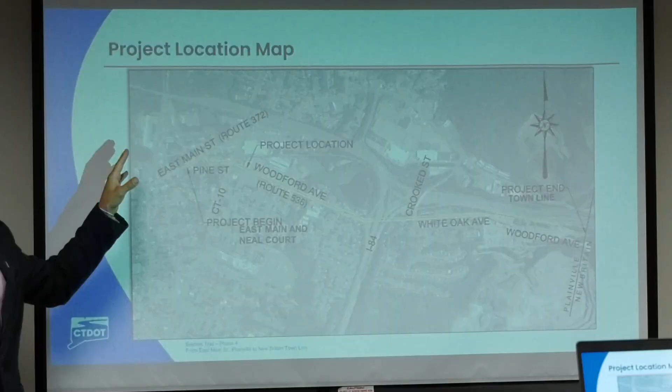So I'm sure everyone's familiar with the project. Largely the project's going to be along Route 536, the state route number, White Oak Ave and Woodford Ave. Any images I show you on the screen, north is always going to be up, okay? So if you're trying to get your bearings of where you are, north is up, similar to the image in the background. We're starting very close to where we actually are right now on East Main Street. The limits are going to be right at East Main and Neal Court, kind of where the Citgo gas station is. That's where this project is going to begin.

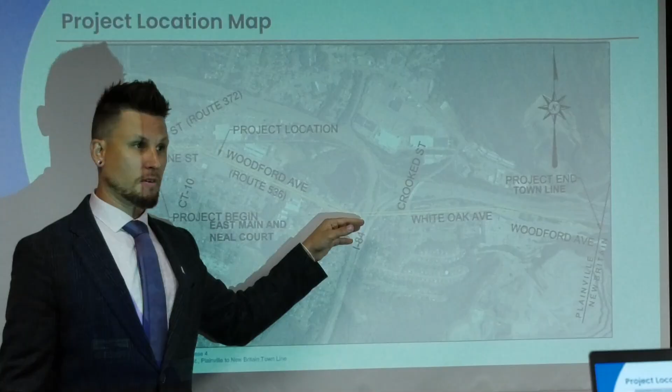There are other projects that I'll touch upon in a second that will tie into this. And then we're going to start heading eastbound, on Pine Street to Woodford Ave in front of the GE, all the way under the underpass of I-84. White Oak in front of Tilcon, and then we're going to get to the town line with New Britain. So that's kind of the general area of the project location.

So a little bit about the project, again I'm sure many folks know already. It's a linear trail, but there is also the addition of some concrete sidewalks. The linear trail is largely on the northern side of Woodford and White Oak predominantly. The southern side is going to have some new concrete sidewalks to tie into sidewalks that may already be there, so that we can create a holistic corridor. This kind of comes from the Complete Streets policy - we want to make sure that users or generators for this trail have access on both sides of the road, and can get to the trail or other sides where it may be necessary.

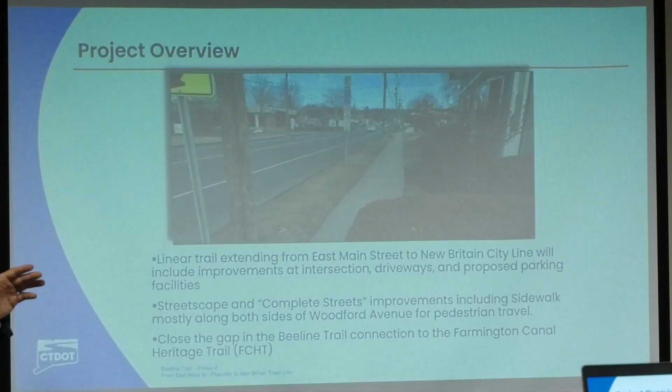So this is going to eventually take you from the Farmington Canal Heritage Trail in Southington, and bring you all the way to the CTfastrak station in New Britain, in areas north and south ultimately, but there are other phases that are already being designed and constructed - they're going to link into this.

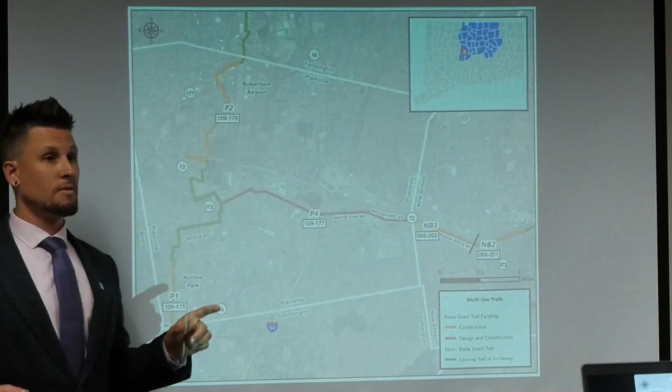So this is a map showing a few of the trails that are going on that I've already alluded to. Where we are right here, right in the middle, we call it P4 because that sounds way cooler, I think, and we use a lot of acronyms - if I have an acronym, please feel free to ask, because in engineering we love our acronyms, just like probably every industry. So we're talking about this maroon line, that's what it's going for, at least on this screen. Our orange line is New Britain Phase 3, Beeline Phase 3. Phase 2 and Phase 1 will eventually get you to the CTfastrak station.

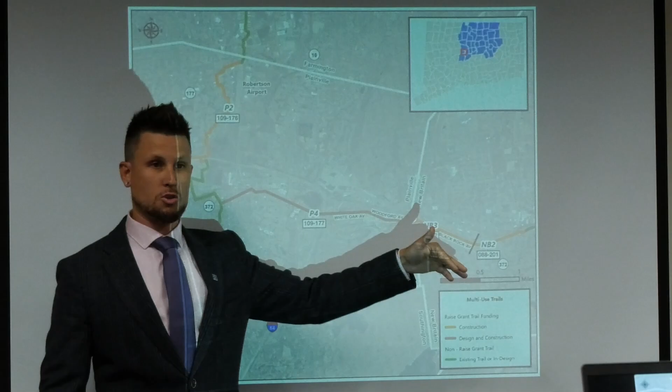So you're going to cross Corbin Avenue and head towards West Main and New Britain, kind of where City Hall is, and then behind there is where the CTfastrak station is. Then we have Phase 2 to the north of our current project, and Phase 1 is to the south where Norton Park is, taking you to the Farmington Canal Heritage Trail in Southington, where there are some other pieces that have just recently been constructed and some new pieces that will be designed shortly.

Everybody with me so far? A lot of head nods? All right, good, good. So existing conditions, just a couple images.

I'm sure if you've ever been through the corridor, you already know what it looks like. But the big overarching thing is there's not really good pedestrian accommodations to the corridor. You're sending your kids out here, where do we walk? They're on the side of the road. You can see a lot of the worn paths through here because people are walking there. We want to accommodate them and make it as safe as possible.

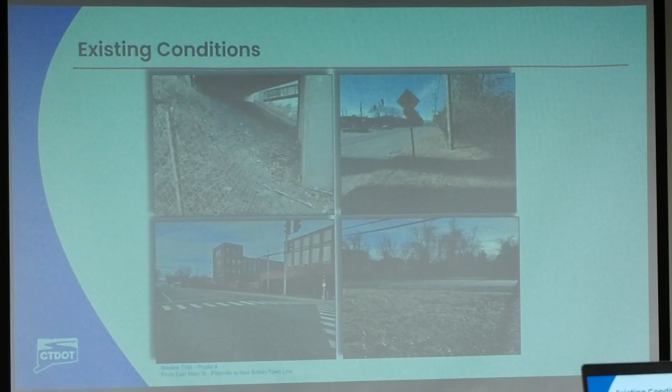So again, just some different critical areas we have in front of GE. You have a couple crosswalks, obviously those aren't really necessary anymore. You've got a very large parking lot. You've got the existing underpass for 84, which is where the trail is going to be going, and I'll show you what that alignment's going to look like. Just different spots along the corridor that we're going to try to get through safely.

So the purpose of the project is always critical. The purpose here is enhancing pedestrian safety. Public safety is always the biggest thing anytime we do any kind of projects. I don't care if it's roads, highways, bridges, sidewalks, trails, etc. So always public safety. We want to provide good pedestrian access throughout the corridor, be it a sidewalk or a multi-use trail in this case.

This is going to be a separated multi-use trail, meaning it's going to be separated from the road. Typically, separated and elevated is the safest trail you can have of all the different types. So you'll have your road, you're going to have some kind of a snow shelf between, or a tree belt commonly referred to, and then the trail, so we can keep that separate. We're thinking about kids here, not necessarily experienced users like maybe ourselves on a trail, but you send your kid out, you want to be as safe as you can get them, right? So that's what we're trying to accommodate here.

So the project goals kind of tie into the purpose and need. We want to enhance that multimodal safety, that connectivity. So if you're biking, hiking, riding, skateboarding, whatever, you'll be able to use this trail because it will be a paved trail, and the sidewalk obviously is to be concrete. And then again, provide that connectivity to surrounding areas and other places along the corridor.

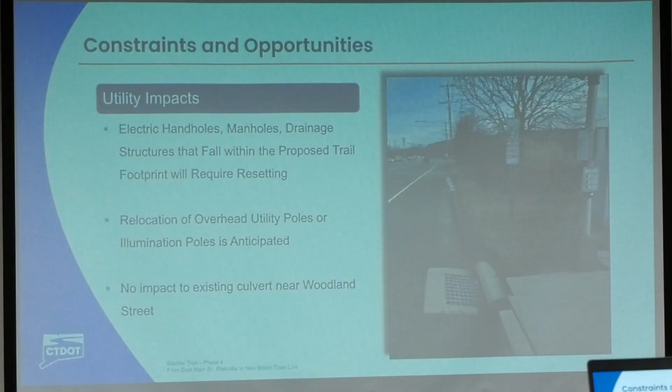I have to go back. There we go. So with that, I'm going to do my best to try to pan around that image in the back right here. I can't really, I don't think I need this. Let's do this. Making it. Ooh, God. I'll fix that. One second. There we go.

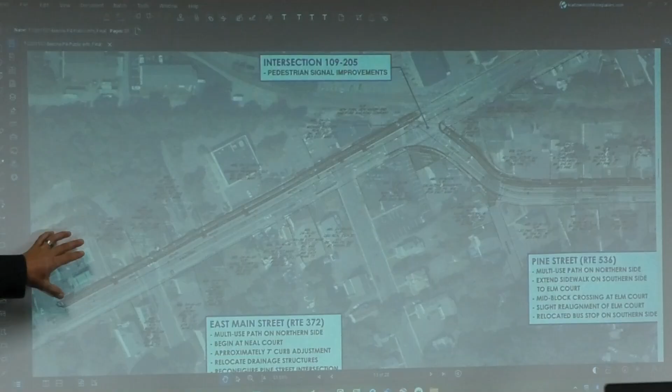All right, so we're just going to kind of go through this corridor. I'm not going to describe all the impacts and everything everywhere. I'm going to do my best to zoom into the areas. Just let my computer load here for a second. So we're going to start at the very western side of the project here on East Main Street. Again, this is the Citgo gas station that's right here, just to get yourselves acquainted where we are. And we're literally right down here, not very far away from the library, okay?

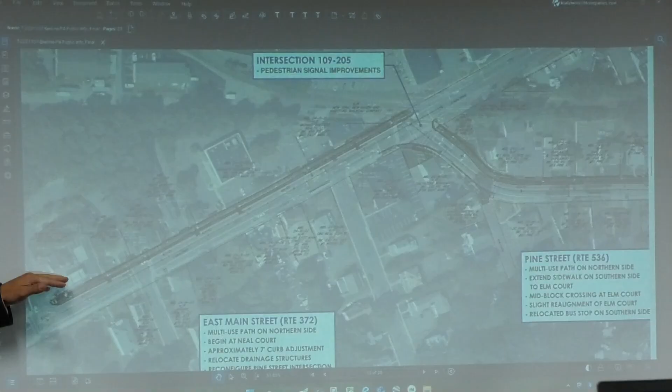So through this area, we're going to be providing about a 10-foot wide multi-use trail, so it's paved, just like this asphalt in the street, it'll be the same type of material. There'll be a little snow shelf between the trail and the roadway. It'll be, again, elevated and separated through this corridor, and that's going to be on the northern side of the road. It's going to take us all the way to the intersection of Pine Street. This area will also be investigated for some complete streets, which means we'll be looking at lighting, potentially adding some other elements here, such as upgrading some of the sidewalks or other features of the corridor.

So it's going to try to use the aesthetic from the downtown and keep it consistent with what's going on. There's brick pavers, things like that.

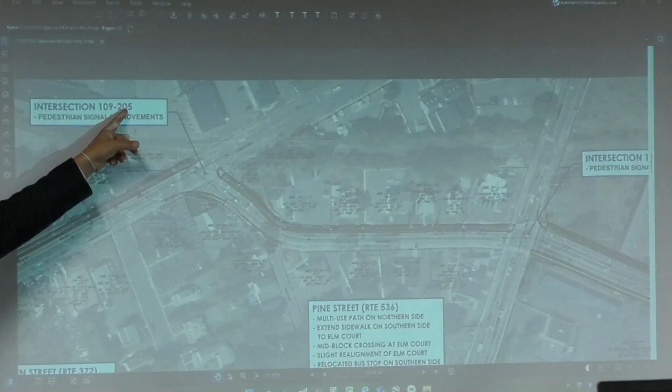When we get to the intersection, every intersection, maybe this is a fun fact, 109, we label every intersection by the town number. There's 169 municipalities in the state of Connecticut. So 109, Plainville, that's the 109th municipality, and this is the 205th intersection for this particular town, or just the number 205. So if you look at any of the traffic signal counts, you see that number. I don't know, my kids wouldn't find that interesting either, don't worry about it.

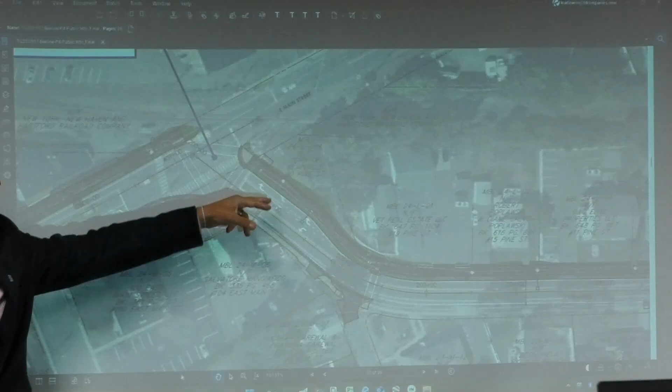This particular intersection is going to have some pedestrian signal improvements, meaning we're not changing the alignment for vehicles. All we're going to do is upgrade for pedestrian activity. Now that we're introducing sidewalks and a multi-use trail, we need to make sure you can push a button, shut down the intersection, and people can safely travel and navigate through.

At Nani's Bakery, which we'll touch on now, we're going to be adding some sidewalk around the bakery that's here now on state right-of-way, so there wouldn't be any impact there. We just might be looking at how we can accommodate the parking that's already kind of bleeding into the state right-of-way and onto Pine Street. This is just one permutation of what that may look like.

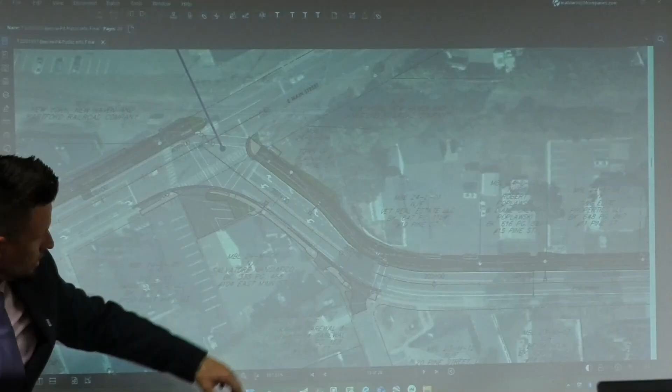The sidewalks on the southern side are going to tie into the next intersection. We have these reference numbers throughout here, just kind of a reference number, so if anybody has any questions, that might be helpful later on.

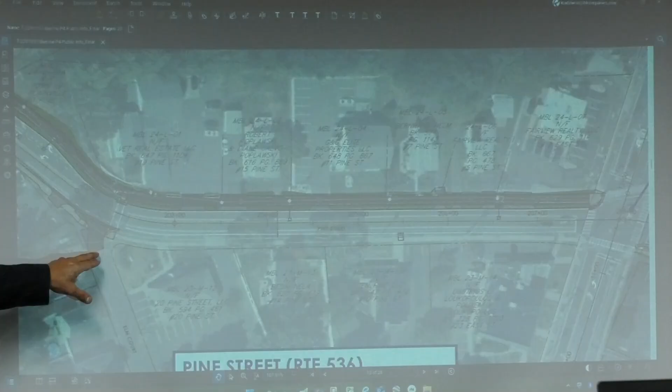So that'll be Elm Court. What we're going to try to do here is kind of tee the intersection up a little bit better. Right now it's that proverbial fork in the road, and we want to have it look like a capital T. It's safer for users—you don't have to look over your shoulder as far, and you have better sight lines so you can see oncoming traffic. This is a lot safer than what it is now.

The multi-use trail continues through the northern side of the corridor, and brings you to, this is Dunkin' Donuts right through here, is that right? Yeah. Asking myself here, I should have got some.

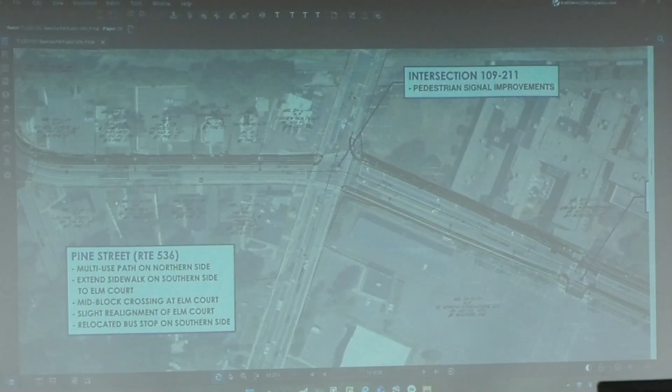Through this particular corridor, the largest of the impacts is just reconstructing some of the driveways. This work is slated to be within the state right-of-way, so there's not going to be any significant grade changes. It's going to be using what's there now.

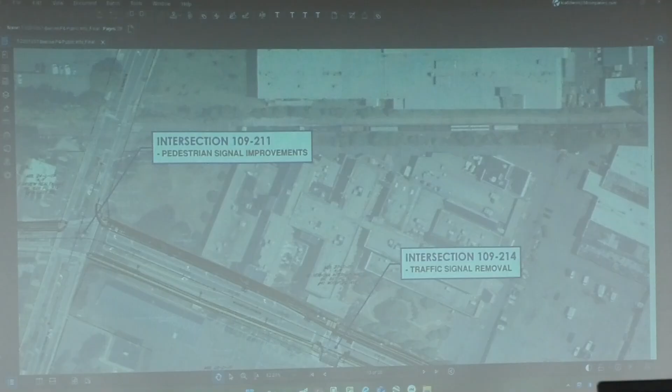As we get closer to the intersection of East Street, Route 10, it's the same idea—we're going to have some signal upgrades so we have the proper upgraded push buttons. They call them APS, Accessible Pedestrian Signals, hence the acronym APS. They're the latest push buttons, with countdown timers and a beeping noise so you can hear them if you can't figure out where they are. Those types of elements and appurtenances will be upgraded for these intersections.

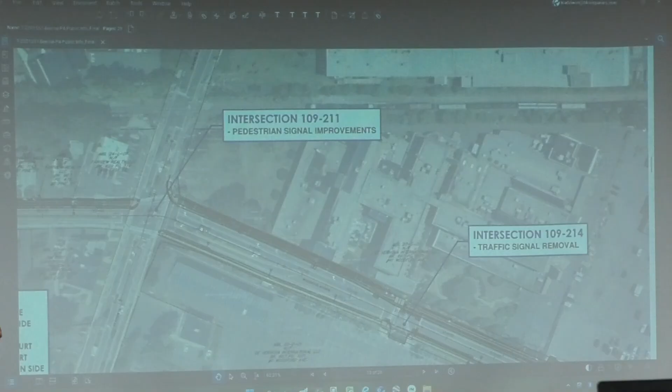This is where the sidewalk is going to start along Woodford Avenue, and it's going to head basically all the way down to the interchange with 84. As I keep going, you'll keep seeing this sidewalk occur. That's on the southern side, and that's relatively new to the project, as Jim alluded to before—it wasn't part of the study originally. The multi-use trail is going to go right in front of GE.

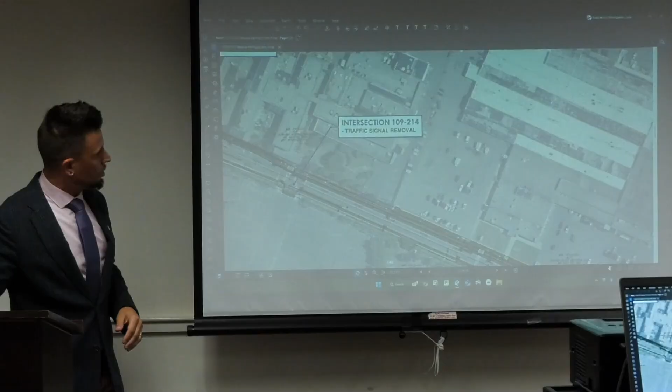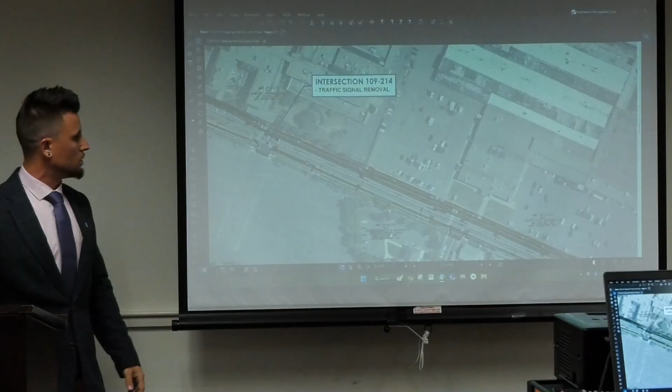One thing I want to point out, heading a little further east, is that this existing intersection in front of GE, we're calling for removal. At this point in time, there's really no reason to have it—we don't know of any tenants going into the buildings. That could potentially change, but as far as we're concerned right now, we don't need that any longer. So the crosswalks would essentially be eliminated, and there wouldn't be any equipment there for the signal. That could change over time, but that's where we're looking right now. You'll see a lot of the side streets will essentially just get the proper treatment.

If I zoom in a little bit, there'll be handicap sidewalk ramps across the intersection as you traditionally would see, and a crosswalk as well, painted markings so folks can safely cross. All the side streets are stop control with stop signs. They're not signalized unless we call it out in the plan. So that's how folks would traverse across.

On the northern side here, you can see just a crossing at this particular station. I don't recall what, it's where the old GE was, but that's a bad example, I suppose.

As we get down to Linden Street, it's the same kind of treatments. We're just taking the multi-use trail all the way down. One thing I want to note, and it's very difficult to see, is there's going to be a lot of utility pole relocations in order to accommodate the bituminous multi-use trail on the northern side. So we'll be working with utility coordination, Eversource, Frontier, whoever the custodian is for the poles, to relocate those poles for the project, which is going to be a bit of an undertaking to get all that coordinated and sorted before we get into construction.

Same kind of treatment. We're also going to be looking at existing parking where there's some areas where there's parking for some of the business owners. Right now, the state right-of-way may be used in order for folks to access that, so we're going to be looking at how we can make sure we can accommodate everybody as we go through the design.

I'm going to keep going because this is very similar throughout this particular area. Nothing really changes all that much. The corridor remains kind of the same. There's going to be no disturbances to the existing culvert crossing here or anything coming from Hamlin Pond. There's a culvert that goes underneath Woodford Avenue, but that won't be disturbed in any way. I'm trying to remember exactly where it is, but if you're driving through the area, it gets fairly wide at the top of the culvert, so there was really no reason to do any upgrades or anything of that nature.

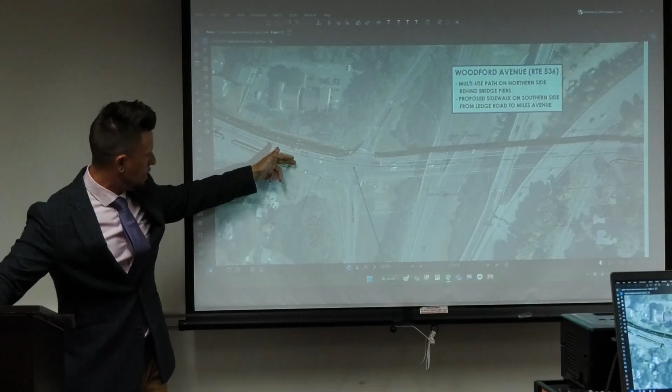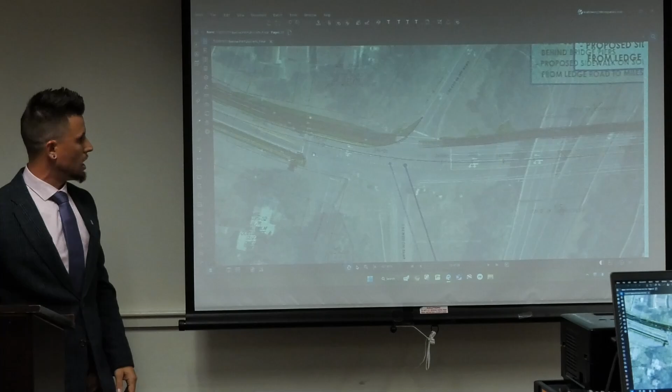I know I'm going quick, it's just there's a lot to take in here, so we're just trying to get through it and then we get to the questions and the answers.

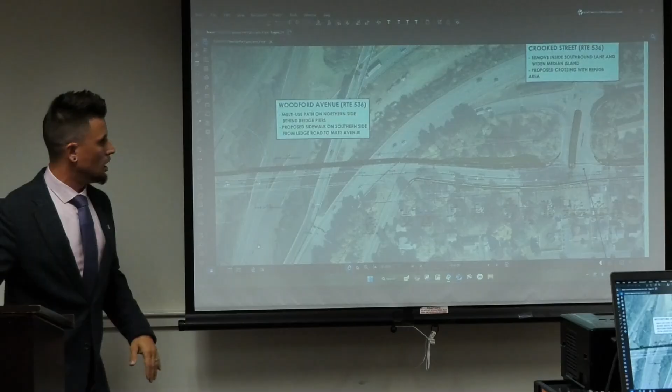This is where it gets a little bit interesting. As the trail on the southern side, the sidewalk ends, the trail on the northern side continues, and we're going to go underneath the I-84 overpass. We're actually going to go to the northern side of the concrete piers that exist today, so you're going to be even further separated from the roadway as you go underneath here. There's some laydown areas, as we call them for construction, we'll potentially use for the project, where the contractor could put his equipment and store some of his materials as necessary. We're going to be looking into different areas. There's equipment there now for separate construction projects.

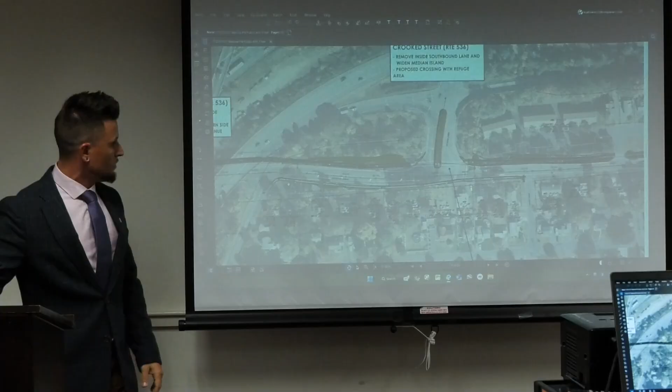As we get to Ledge Road, and start again heading east, that's where the sidewalk picks up again. And I was just talking to a gentleman about this particular area. So from here all the way down to Miles, we're going to essentially be doing what's called a road diet, so we're going to shrink the lanes. Right now, if you've driven through this corridor, or you get closer to Tilcon, they're extremely wide lanes. Traditionally, we have about 12-foot lanes. These are 15 to 18 feet wide. All that's really doing is asking people to go faster, because driving is perception.

If you feel safe, you're gonna go on a straight road and go very quick. If it's narrow, with a lot of trees like an old country road, you're gonna slow down. That's just human behavior, so we want to try to slow folks down now, knowing we're going to be putting pedestrians and multi-use activities along the corridor.

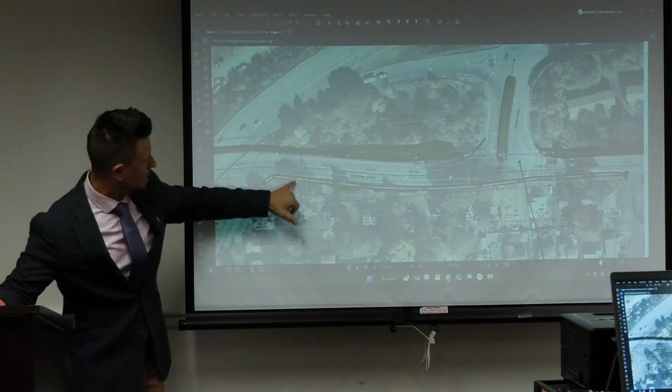In order to negate the existing slope through this area, which gets higher as you get closer to the houses, we wanted to bring the road in so that when chasing the grade, we don't have to go nearly as close to the homes. That way we keep everything contained within the state right of way, to really limit the impacts, if that makes sense.

As we get to Crooked Street, we know it's very busy. Right now you have double right turn lanes that take you from Crooked, which is necessary. So we looked into this with our traffic engineers, and they determined that we could remove one of the right-hand turn lanes, so it's a single right-hand turn lane.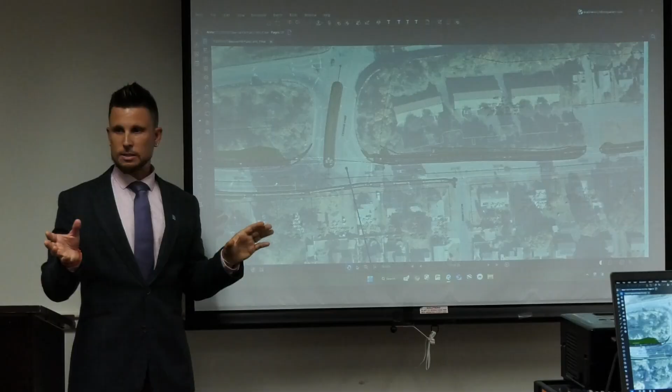Why that's important is because as the trail user crossing through this area, it's extremely wide. What we're going to have through here are push buttons so that the intersection will shut down and turn red, and there's going to be this refuge island. So essentially, you're going to cross and get to this raised median, which exists today.

If you don't have enough time to make it across, you have this area that's going to be raised and separated, so you can stay and wait until the signal turns red again so you can finish your crossing. Now if you're on a bike, maybe you can do it in one swoop, and that's fine.

What's also important about removing one of the lanes is it shortens the distance. So ultimately it's twofold: a shorter distance is going to be a safer crossing, and it's also going to be less time that the signal is shut down for someone in their car. How many times do you see someone push a button, walk immediately, and the signal is shut down, and you get impatient? Maybe that's just me, but it does happen.

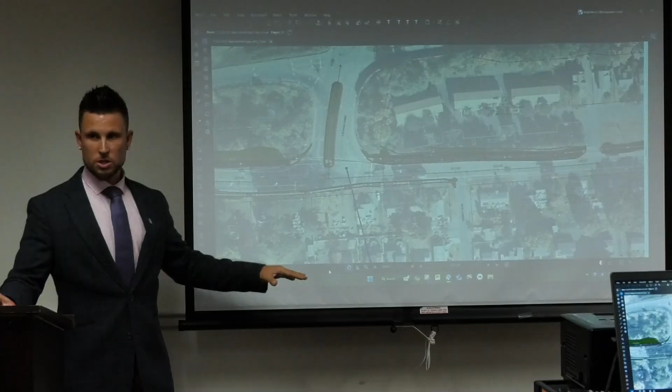So with that being said, we're going to be introducing a crosswalk, so folks coming from either side, east or west, will be able to push the button, get to the trail, and they can head east to New Britain or west to downtown here in Plainville. Either way, we want to be cognizant of making sure we can get folks to and from the trail safely.

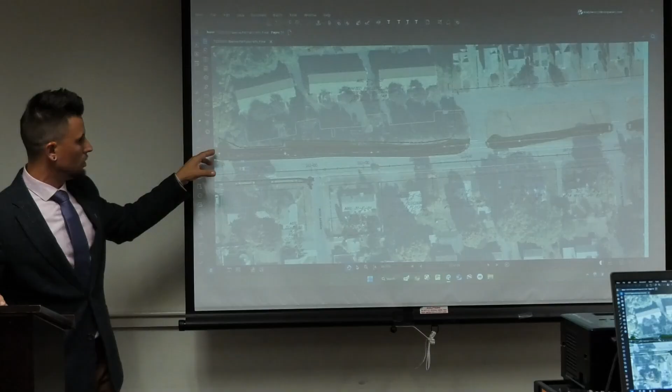As we head in front of the Woodford Common Apartments, condominiums, we're going to be putting a little retaining wall so that we can keep the trail up, basically at a similar elevation as the existing roadway. The grade eventually levels off as we get to these open grass areas.

I don't know exactly, they're not like a town green or anything like that, but I know everyone kind of understands where we're going. One thing we were looking to do is provide parking for the trail. It's always important to want people to be able to park and get on the trail, not just have to wonder where to park or how to get there. So we're going to be providing about a 15 spot parking lot for folks to enjoy the trail access.

A couple neat pieces: have you ever been to the Cape Cod trails, or really a lot of trails? They have these little stations you can go to, with bike pumps and little tools and things. So we're going to be putting some of those amenities—that's the idea, at least right now. If you park your bike and have a flat tire, which seems to happen to my son every time like clockwork, I digress—we'll have something there. Maybe that's selfishly for me, but that's kind of the idea.

We want to try to make it accessible for everybody and have a place to park. That said, as we get closer to Tilcon's property, there's a food truck right in this area, and we understand folks might want to park and access that food truck during the day or for lunch. So we might be working with that a little more, but for right now, this is what the plan is going to show.

We've had a couple coordination meetings already with Tilcon. I've spoken with Tilcon's representative, and we're trying to make sure we can come to a good resolution for the trail. Those conversations have started, and right now this is where the trail alignment is preferred.

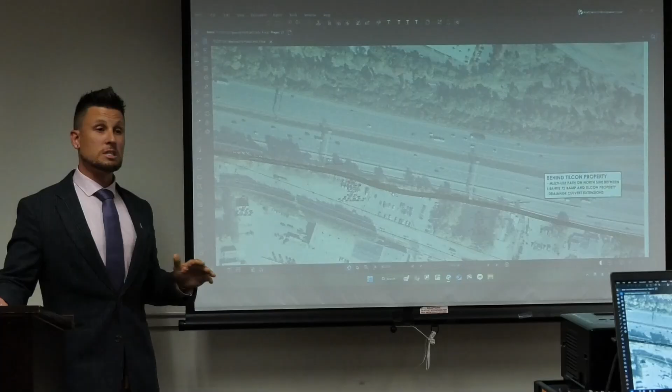We're trying to stay away from the roadway here through Tilcon. Anybody who's driven through there knows it's very dusty, certainly not safe, and sight lines are off. So we want to keep trail users as far away as we can. That puts us up against the Route 72/84 retaining wall, basically touching it, and that's where the trail is going, to the north of Tilcon, just south of that retaining wall through this area.

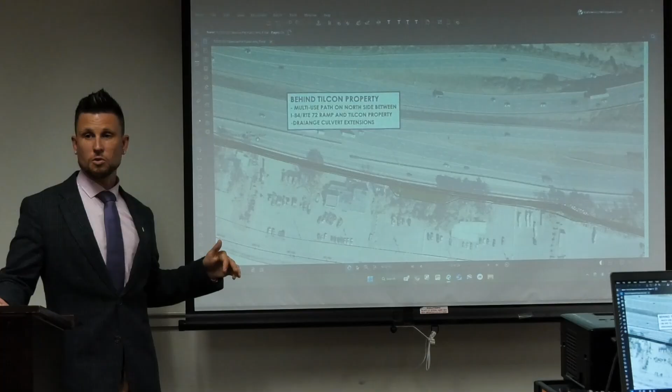We're having discussions on what this is going to look like, what security measures might look like, whether there's going to be lighting. There are a lot of elements we need to look into in this particular spot because of what Tilcon does for a business. We want to make sure users are safe. There are other areas along trails, like the Farmington Canal Heritage Trail and East Coast Greenway, that we'll be looking to for different elements we can use to keep the area safe for everybody.

As we get back around Tilcon's property to the east, we're heading east to the town line with New Britain, who has their Phase 3 project that will tie right into our Phase 4 project. That brings us to the end of the project.

I'm going to take a break just for a second. There's a lot of talk. And we're going to get back to the presentation. Again, if anybody has any questions, we can pull this back up and come back to it. One second—let me finish so we don't set a precedent of a million questions just yet, but I will absolutely get to your question. All right, we're just going to get through a few more slides, so bear with me. Checking on time—doing okay.

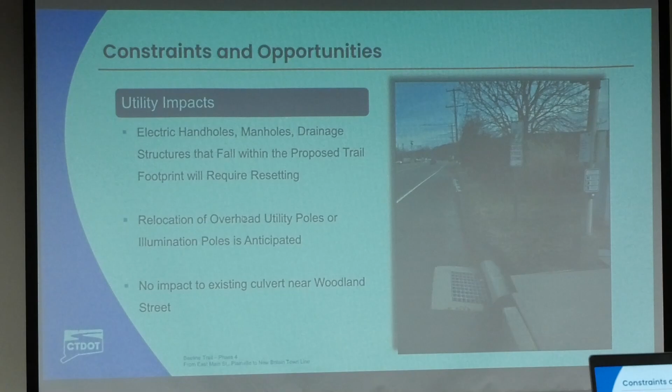As I alluded to before, throughout the corridor there are going to be a lot of different constraints, be it utility impacts above ground—there are overhead utilities, and a lot of poles that will need relocation. We're going to work in the next phase with utility owners to get those poles coordinated and moved, to make sure we can accommodate the trail. There are also drainage structures, manholes, sanitary, water, sewer, and gas lines that all need to be coordinated. So there's a lot to it, and that's the next phase we have to start working toward.

And that would be me. I don't have to talk. Yeah, give me a break. All right, thanks again. You got it.

Good evening, everybody. My name is Jack Carlson. I'm an assistant project coordinator with the Department's Rights of Way division. Our office is responsible for the acquisition of any property rights needed for transportation projects.

In a moment, I'm going to provide a brief overview of our acquisition process, but there are a few things I'd like you to note. First, any property impacts shown tonight are subject to change—they're still being finalized. Second, any acquisitions are done in accordance with Connecticut General Statutes 13A-73 and 13A-98E, as well as the Federal Uniform Act. Third, we don't expect you to remember everything; our office will be with you every step of the way if you're an impacted property owner, to potentially re-explain or go over this information.

Our process begins once the project has reached a specific development milestone and all the property impacts have been determined. Our office will generate and mail out a formal letter of intent to acquire, along with a property map that details the specific property impacts to each affected property owner.

From there, we establish a fair market value, and we use that valuation as a basis for our offer of just compensation. We provide that offer to the property owners in writing, and a right-of-way agent will make themselves available to each affected property owner to meet, discuss the project, explain any potential impacts to their property, and review the offer sent.

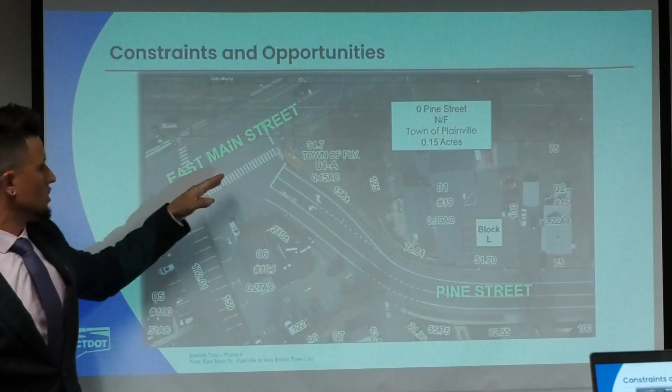There's just a few pictures here. Some of the areas we wanted to highlight: there's a sliver of land at the northeast corner of East Main and Pine Street. We highlighted the faint yellow area that would be required. The town already owns it, but because it's a state project, we have to go through the process with Jack in order to obtain the land as necessary.

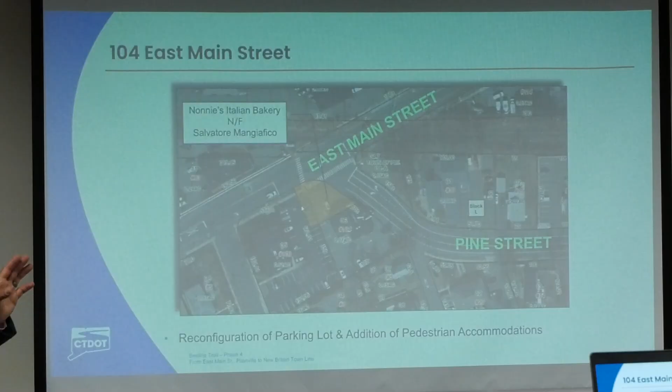This is showing the area I was talking about before, where the sidewalk was wrapping around the intersection—the southwest corner of East Main and Pine Street, by the bakery that's here now. Because of the sidewalk going in, it was going to close a portion of the driveway, so we have to work with the property owner to come to a resolution. That's not showing that we're taking over property, I want to be very clear about that. It's just what we might have to do to make sure they have parking.

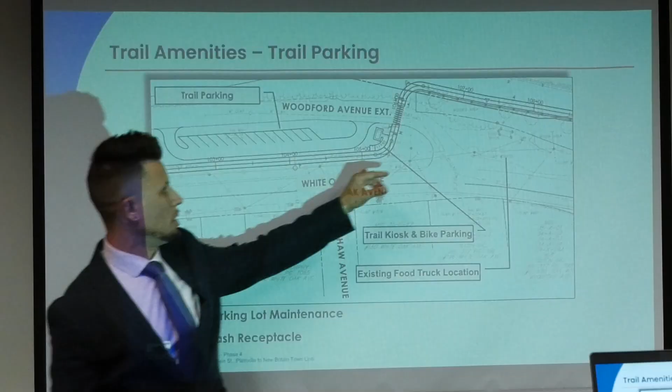I already zoomed in on this particular area. I'll just highlight that the trail parking - again, we were talking about Tilcon's over here, and then there was a food truck over, just kind of right over here. We want to make sure that we accommodate trail users and they have a place to park so they can actually get on the trail safely, not just park at someone's house or on the side of the street. That's generally the idea.

And then just a few more pieces for environmental and historical impacts. We're going to be working through more of the environmental impacts, and screening has already been completed for the project. Right now, we're showing no floodway impacts. There's no negative impacts to any Natural Diversity Database - NDDB, yet another acronym - any potentially endangered species to the area. If we did come upon anything, then we would have a process that we'd have to follow. Section 106 will be required for the project, which is more about the State Historic Preservation Office, but no adverse effects to historical properties.

And then we're almost done - so the project financials and the schedule. We're looking to complete the design in the fall of 2026, so that's basically a year from now for design completion. And then we're going to be looking to go out to construction in April 2027, so that's about a year and a half away from where we sit today.

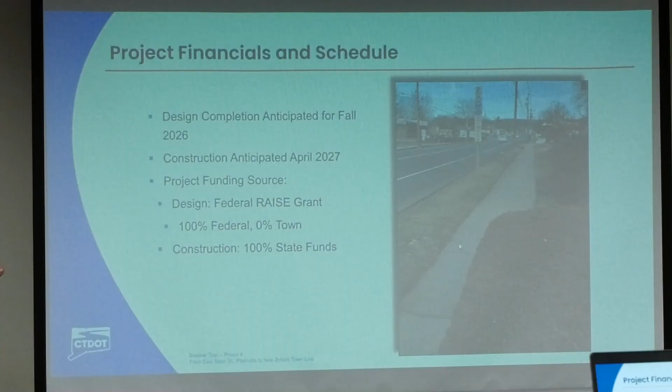But the funding source is one thing I want to highlight - Jim already alluded to it. It's a federal RAISE grant, which is important to know where the money comes from. In this particular case, the design is 100% funded by the federal government and 0% comes from the town, so the town isn't paying anything for any of this. That's a pretty good deal in my book - if I can get 0%, I'd take that too. Construction will be 100% state funds, so the state's stepping up in a pretty big way here to fund this trail project and other trail projects that were highlighted before we started this presentation. So folks are pretty excited about that.

And then we just have - we're actually at the questions. Someone's going to have a question now. I do - there we go.

You guys are quiet. Where does it actually start, the trail? I was confused - where's the start in Plainville, where it ends in Plainville? Let me pull up that map, I was confused again by all that. You said... Sunoco? No, not Sunoco. Cinco, Sitco - is that near the center of town? No, I mean it's not the exact center of town. I don't know, let me see how close I can get you.

I thought it was going to connect to the other trail eventually. No. Phase 3 - I'm not so versed in the subsequent phase, but I believe the other phase is on the opposing side of town hall, that'd be like the southern side of town hall. Yeah, so I could just clarify - my name's Mark Jewell, good to see a lot of you again.

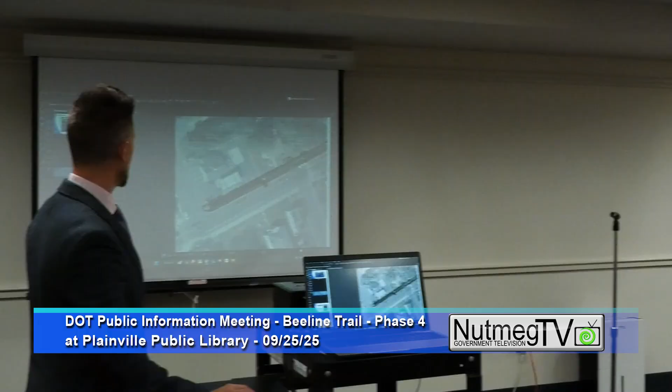The starting point that Ken described at the Citgo is starting there because that is where the town's streetscape project stopped. The wide sidewalk, brick pavers, decorative lighting, all those details stop at the Citgo station, and we're picking up from there. The way a trail user would make the through trip is pedestrians would use the existing sidewalk, and bicyclists would be in the roadway following the sharrows to get past town hall, across the railroad tracks to the fire department. That makes the connection through.

That is, if the sharrows get painted again. Yes, that's a good point. They were wonderful, and then they got left out. So that's a big one.

Did you just say there's no plan to connect to the other trail? No, that's what I was just trying to explain, that the connection is already there, barring the missing sharrows. The pedestrian connection is on the existing sidewalk, the bicycle connection would be on road with the sharrows that were there and need to get put back.

So do you plan on running the bike trail all the way to West Main Street, connecting to the Harris Trail? Not as part of this project. Are you working with the people doing the other project? Yes, and Mr. Hall is here to represent that project, but tonight's meeting is just about this project.

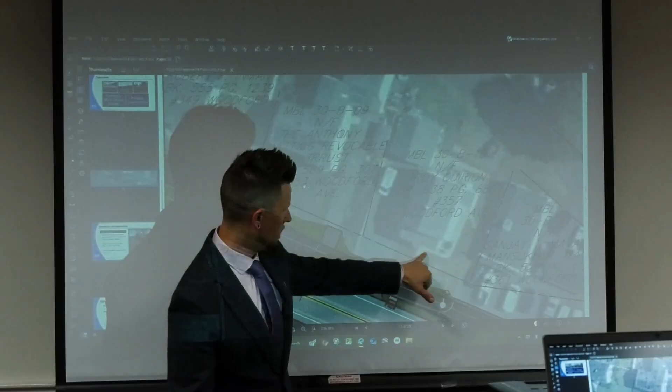So you're saying the state right-of-way, so it's not going to come into my property at all? Right, that's correct. Does the state right-of-way extend farther into the yard now? No. So that means the state has no right-of-way into my yard at all once this is built? Right, they've used it up. That's where Jack would come into play. If the state were to move this right-of-way line, they would have to talk to you and you'd go through the process Jack explained on those right-of-way slides to acquire or use some of your property. But that's not the case here.

Does that make sense? How wide is this path going to be? This here is 12 feet. And that's going to be all going into the road? No, it's going to be separated and elevated.

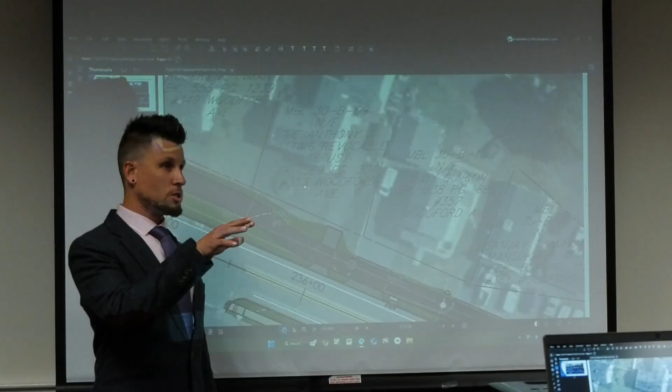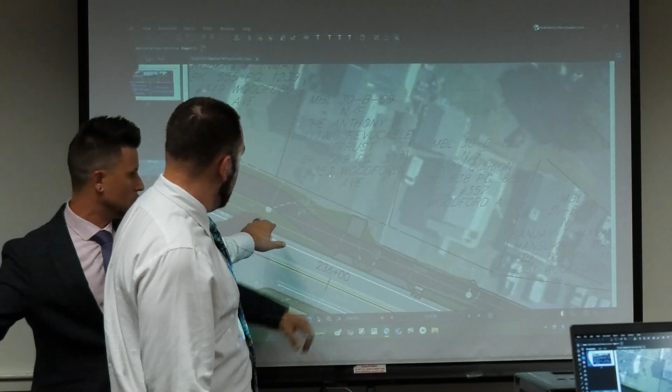I think you can see the existing curb right here, it's just hard to see from back here. Yeah, I just don't have a distance. I mean that's 12 feet, well that's probably similar, 24. So this is where your curb line is right now, and the new curb line is this thick black line, so it will be bumping in slightly in this area. It's like 5 feet. Yeah, about 5 to 7 feet, depending on where.

Woodford Ave, like everyone knows, is wide, and it's just one lane and people can fly. So the intent is to diet the entire road, pushing in from the south side and the north side, to just 12-foot lanes, 4-foot shoulders, as opposed to what's like a 15 or 16-foot lane and a 10-foot shoulder on either side. It's a lot of pavement.

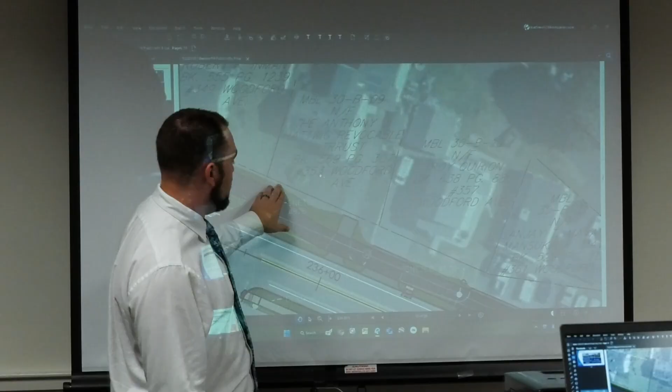So your lawn is within this area, but as Ken was saying, this thick line here is where the state owns part of that lawn. So we're not anticipating impacting property at all in this location, it's all within state land. Instead of one, you're going to have... Yes.

Which one is Jim's? Right next door, right on the other side. Right here, right?

That's mine. At lunchtime, the big trucks park here, exactly where they are now, and they come up in front of our houses. More in front of my house, but they can park in front of his too.

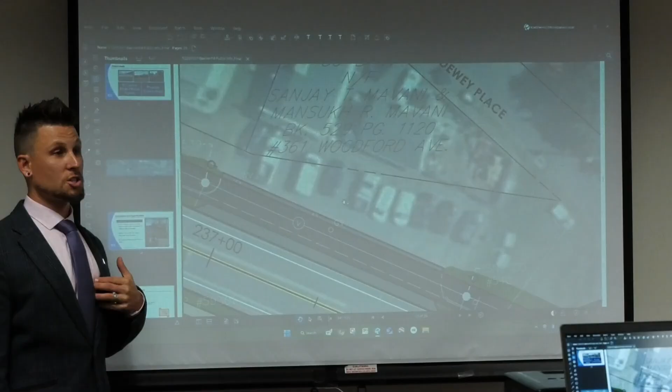Yeah, right. So that's not really the purpose or the need of this. I'm not going to solve their parking issue with this project, right?

It's also interesting if you look at the right-of-way line and the image behind it - this is actually state land here too. Well, I don't know if that's true, but...

Do they park on the street, Ken? Is that what we're hearing, that they park on the street? Yeah, they're saying they park everywhere. Oh, okay. Yeah, they park right in front of the house.

So are you driving at the point that this trail is impacting the parking that's here? Because... Yes, yeah, they're never going to be able to pull in below. How are they going to cut through?

So right now the design is showing a curb cut for them to get through and cross over the trail, but that's the interaction we have to figure out how it's going to work.

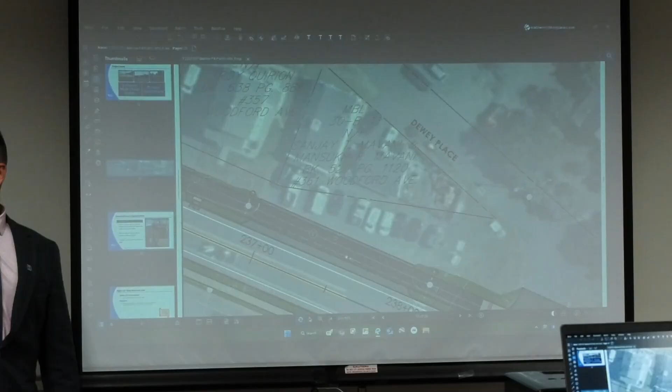I don't know if Jack, being the representative of the right-of-way division, this is his arena.

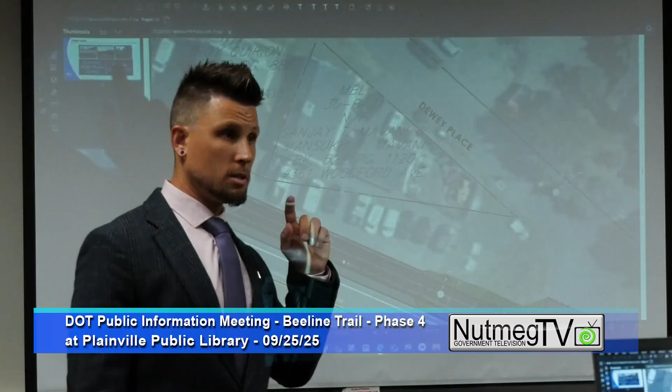But right there, right there, there's a road that goes back behind the house. Couldn't you go around through there and alleviate all of this? So Dewey Place? Yes, right.

We weren't part of the original study as to why the trail is going through this corridor. Mark, I don't know if you have anything to add as to why you want to go through Dewey Place?

Would it impact and actually cut off more residents, where Hamlin Pond touches the highway and the railroad tunnel?

If you were to go around there, if you went right down Dewey Place, you would just come right back out onto Woodford. Yeah, it's just a U. Oh, the horseshoe. Yeah, the horseshoe.

Yeah, that's private property, and that's a much narrower right-of-way, and it's not state right-of-way. The state's trying to stay on their own property and keep the impact to the least amount of people possible.

I was just talking with Devin about the on-street parking, and we can look into that further, see the utilization now, and try to accommodate that in the design. So we'll look into it.

What's the plan to control the dust if that right-of-way through Tilcon goes through? There's a lot of dust there now. With the pedestrian walkway and the trail, what's the plan to control that dust? We don't have a plan in place for dust at this point. It's going to be a big problem.

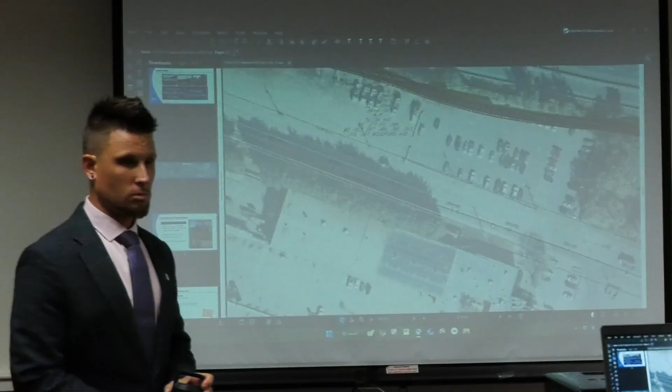Those aerial images aren't necessarily exactly where things are in real space. From the way the camera takes the picture, it could be parallaxed in some way, so there could be a couple feet either way between that line and the image. Everything within the survey is correct though. If you go up there and see light gray lines delineating things like parking lots, that's in the right spot—it just might not line up exactly with the aerial image in the background.

Who's going to be responsible for maintaining the trail—whether that's trash or general maintenance? The town, right? Yes. Is that true? There's sidewalks going in as well? I believe so, yes. The town council passed a resolution about a year ago—actually, 2 years ago, longer than a year ago. Was it 2 years ago? It wasn't us, but yes, there'll be a maintenance agreement that will have to be in place.

What does that mean, a maintenance agreement? Is it nothing to the owner then? Is the town going to be responsible for maintaining any part of these new sidewalks? Is that accurate? That's a local ordinance—I'm not sure how Plainville does it in their town.

I didn't hear your question. The new sidewalks in front of a lot of these properties—who's going to be responsible for maintaining snow removal? The property owner. Typically snow removal is the property owner's responsibility, while any infrastructure improvement, repair of the sidewalk, or replacement is on the town.

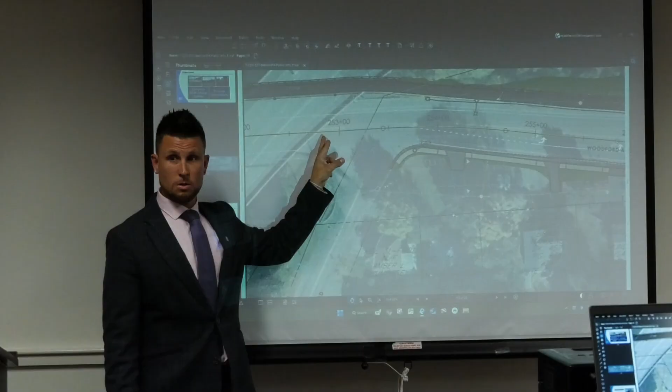Are you taking that away so that when they're looking left, are you guys going to adjust for that when you build further into the road there? If you're coming down Ledge, heading northbound, it's already a huge grade, because this goes up. So you're saying as you're coming down here and looking left, you're already in the road pretty much when cars are turning. Through here? Yes. As you can see, we're not actually doing any work on the western side of this intersection at all. We're just starting the sidewalk here on the eastern side to get you towards the intersection of Crooked.

Is that a concern, that you're encroaching further up with cars coming from the left side? Through here? Let me see how far we are. Certainly something we can take into consideration, because there's already almost a lot of accidents there in general. No, that's good for us to know. There might be some treatments we could do on the approaching side of that intersection to make sure folks don't get too close to the intersection when they come out, especially with snow removal, because that's where they pile the snow. That makes sense, thank you for that.

So right here where she's saying, is it the sidewalk extending over to the left there, going under the underpass? No, not at all. So they don't connect at all? Correct. The multi-use trail will be your connection on the northern side.

The idea here is we're trying to limit the amount of crossings of the on-ramp. Ideally, we don't want to put kids on their bikes and people walking as drivers are trying to accelerate onto 84. That's why we're limiting it, which is why we want to put the trail on the north side, because people are decelerating as they come down the ramp, so their foot's on the brake. So it would be more ideal to have someone decelerating than accelerating. That is true.

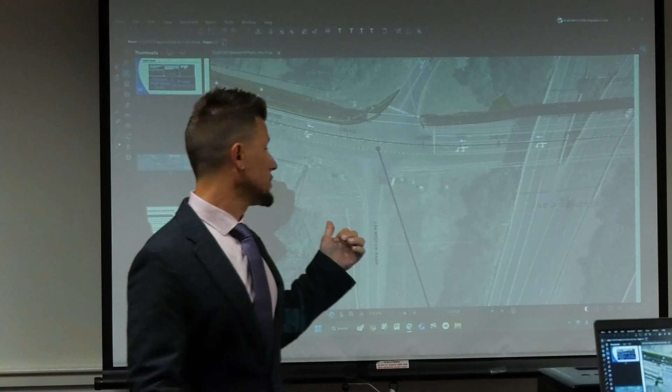There didn't seem to be any mention of trash receptacles or porta potties or anything like that. Generally speaking, porta potties would be up to the town if they want to put some facilities at the trail or the trail parking. Yeah, because they would have to maintain it.

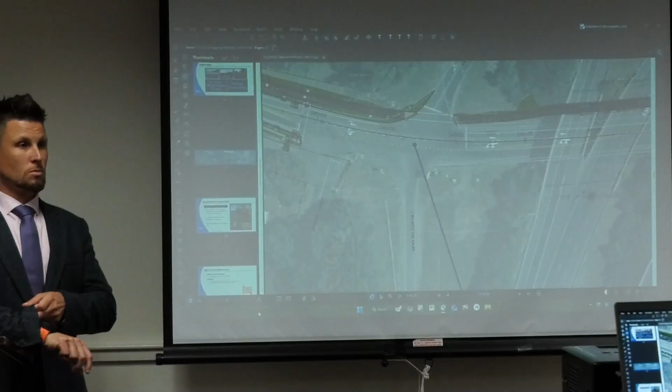Maybe an obvious question, where are people supposed to put their trash cans now, on the sidewalk? I'm right around that corner, that was just being asked. What am I supposed to do? Generally speaking, you could put them on either side of your driveway apron. That's what I do for mine, because I don't have a sidewalk, at the very extents of your apron. Sunday nights, that's what it is.

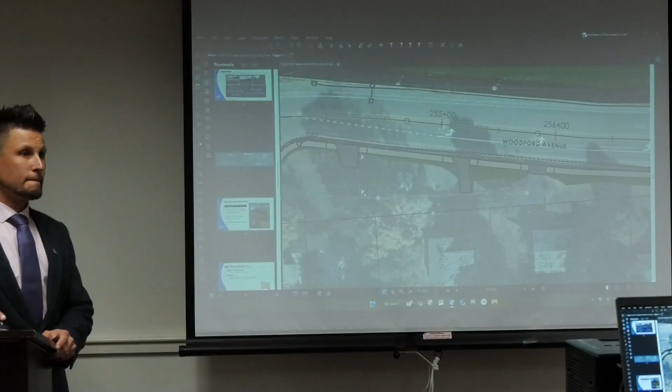It's a bit of an impact for 12 hours of your day until they pick it up and you bring it back. Not worried about that, just practically, can the trash trucks reach over the sidewalk? No, I'm saying right here, right in the corner. Oh, so they don't have to reach over the sidewalk, they just go in the corner.

But to go back to the comment about restroom facilities, Stephen, correct me if I'm wrong, but I believe there's one called for at the parking lot at the exit 1 off-ramp of 72. That's correct, that trail project does have a restroom facility there. We do try to consider that when thinking holistically statewide, like where we have them in Cheshire on Jarvis Street, at 2 places actually, and we try to space them out. If there's an urban environment where people can visit businesses, have economic development and use restrooms, we try to encourage that.

We have a lot of effort trying to get parking everywhere as well. Plainville is going to have a number of parking lots. You've got the existing one at Northwest Drive, the one being constructed at the exit 1 off-ramp of 72, parking downtown, this little parking lot in this project, and New Britain has a couple they're constructing as well, plus CTfastrak. So we're trying to space them out. Finding real estate for parking lots is a little more difficult. The Norton Park lot being proposed will help alleviate the pressure on Norton Park, also behind me.

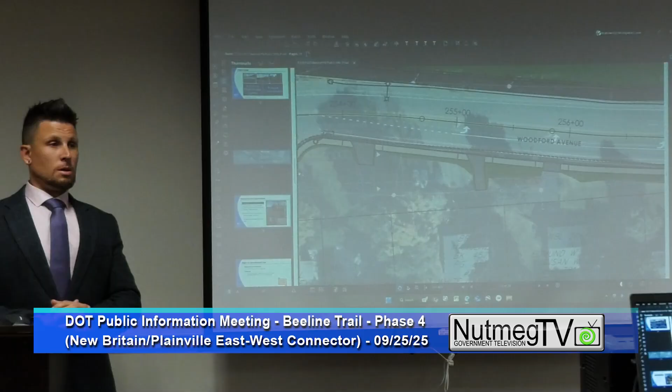Thank you. Relative to the sidewalks, anything that happens on those sidewalks, snow removal or otherwise, whose liability is that now that they're running in front of theoretically our property but on state land? I don't know if that's maybe a lawyer question more than anything else, but are we taking on additional liability as owners with these things going in?

If somebody slips and falls or crashes their bike or whatever. I don't have an answer on who's liable. I can answer that - I'm not a lawyer, but I'm Mike Sherpack, Connecticut DOT.

Sidewalk liability is a common question. When it comes to who's liable, DOT's role is helping towns build their sidewalk network out. When we propose a new sidewalk where it doesn't exist today, we enter into an agreement with every municipality we're building it in - we do thousands and thousands of feet a year. That agreement says the municipality is responsible for the snow and ice removal liability for the sidewalk. The municipality can then choose to, and I don't know what Plainville's rules are, some municipalities do it differently - pass on some of the duties of snow and ice removal onto the neighboring abutting property owners. That's a municipal thing, not a state thing.

What we've found is that sidewalks are incredibly important to creating a safe place for people to walk - mobility is a big thing for pedestrians, and a big thing for state DOT. So it's something we're really encouraging towns to participate in. We see the benefit of it, we hope you do too. Obviously, that's why we're all here. We're here to listen and see how much benefit you all feel you have, and we're here to explain what we think is best from a state's perspective.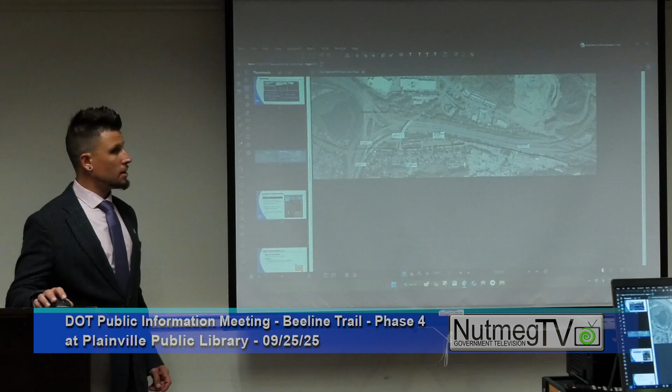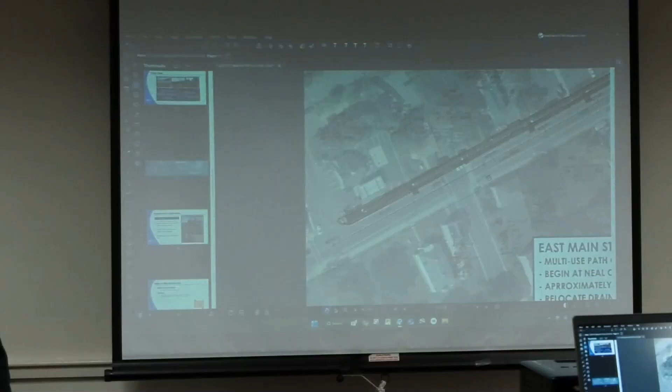It's very close to the very beginning of the trail, at 85 East Main, just past the gas station, right at the beginning, just past that brownstone. Wait, that's where my map cuts off—oh, sorry, yeah, we're at 70, the big square building right there.

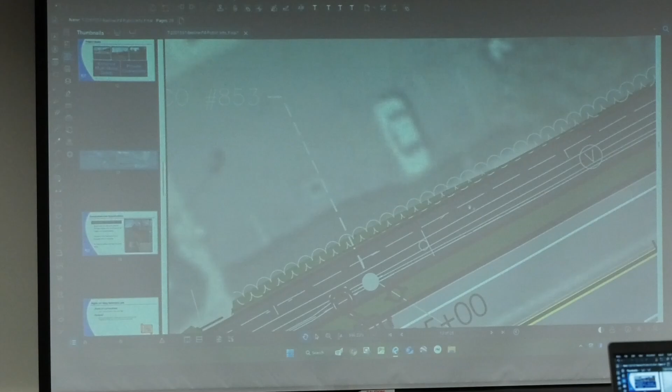Yeah, so we have a sidewalk in front of us right now. Can you zoom in so I can see if we're using the sidewalk and it's turning into something else? Can you zoom out a bit more so I can see the entrance of our parking lot? Okay, we have two entrances—if you zoom down just a little bit, there we go.

Okay, can you see my property line? I can't tell where the end of my property line is versus— Yeah, this is going to be tough because it's right at the hedge line. Is that just the curb of my parking lot? Yes. So right now we have landscaping there, a curb, and direct access to the parking lot right there.

So is there going to be some sort of boundary put up so people don't accidentally fall into my parking lot where all those cars are? I have a tree there—do I lose the tree? Who answers those kinds of questions? This tree right here, yeah.

So right now, this white line here is kind of showing where your hedges are. As far as putting up a barrier, that's certainly a discussion we can have. It's good to know that's something important to you.

So regarding the sidewalk that's obviously getting maintained—if this becomes multi-use, I'm just kind of asking the reverse question. You're getting a sidewalk, I'm losing a sidewalk in front of my property, so I was curious what that means. Is that a town thing too, if it's multi-purpose? So I don't have to clean it anymore? Yeah, that'd be a question for the town.

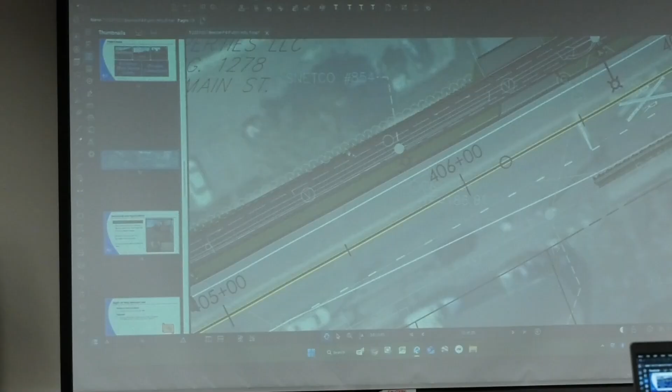Just to clarify, there's no right-of-way impacts proposed here. Yes, I understand, but—right, understood. There's my landscaping, there's my parking lot, there's the end of all that multi-use. I don't know the answer, but right now, is your back of sidewalk away from your existing hedges? It's in front of—literally where that is, that's where the sidewalk is. Does the back of that sidewalk touch those hedges now? It's some distance away—I have probably 8 feet.

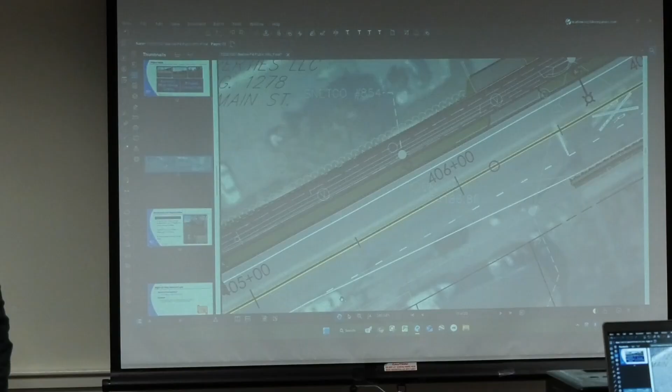Okay, I want to maybe add something to this. In this particular section, what we're envisioning as the trail is what you have further to the south and west—more of the decorative, pushed-forward style. I don't know who maintains that today, or if you'd call that a trail or a sidewalk.

But we can certainly work that out with the town as to what that agreement looks like. That's an interesting question. I haven't thought of the answer for that.

I know that's my property there, but West Main Pizza is a little bit more down, and it looks like you're literally going to be touching the building. That's where their ramp for their entry, for their actual building, is right there, their ramp to get into the physical building. I'm not the owner of their building.

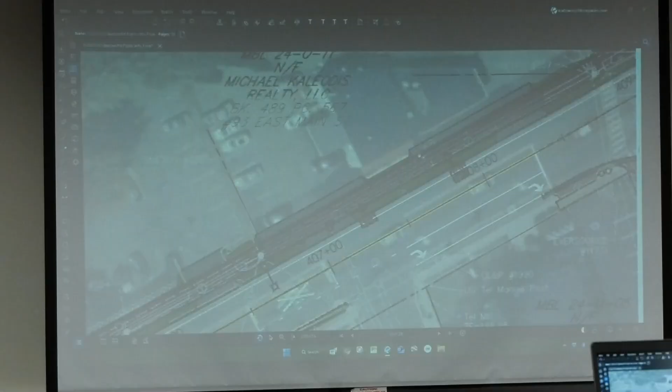Right, no, understood. Take that window right there. Do you maintain that sidewalk that's there now, or you don't have the answer? I was just curious, I think my landscaping people probably do.

Okay, and we've only been in that location for one winter so far. We just moved in January.

In the beginning of this presentation, you talked about this being funded via federal and state funds. Is this going to be the same situation as with the Farmington Canal Trail, in which once it is completed, it becomes the responsibility of the town of Plainville and the Plainville taxpayers to maintain it for any repairs? Will this hold the same true? Yes.

What would be, if you lived here, the benefits for you and your kids if you were to live here? Why are you so ready to come in here and ask these folks to take on maybe a little bit more responsibility with the sidewalk and use a little more salt from their buckets? What is the purpose for this? What are the benefits?

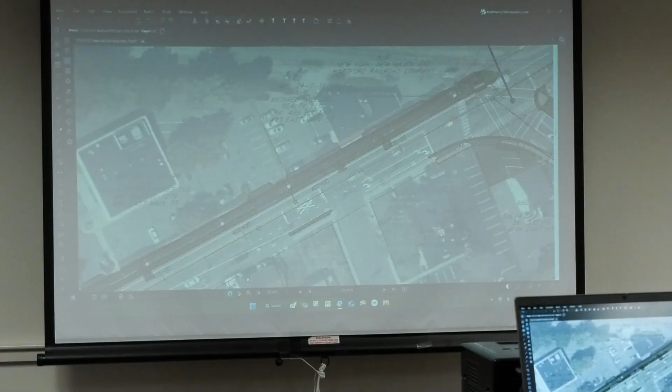So have you been to New Britain in the last year or two? They're building it through New Britain, right next to it. I'm asking if you've seen the improvements in safety and quality of life for residents of New Britain because of what they've done there. And why wouldn't people in Plainville and every other urban community want that? No, I'm not saying anything negative. Well, that's why I'm asking you. The area that's going through New Britain is totally different than this.

This extension is much more complicated than the trail they've already built. It really doesn't affect homeowners to the same degree elsewhere as it does here. This affects people more than it does in New Britain.

I've already walked through the trail. Have you been through the Farmington Canal Heritage Trail through Southington? It's really the center of town, and it abuts a lot of residential homes. It helps property values too, and the center of town is always busy - economic benefit.

Are you guys planning on doing any speed bumps to prevent e-bike speeding?

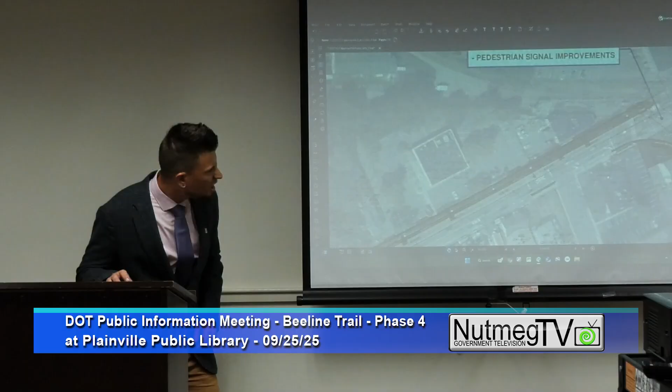No. When you're shortening the roadway for Woodford, how are you planning on making it smaller under the underpass area, because you're not really touching that area? Right, so under the underpass, can you repeat the question? The 84 underpass that's next to me - I'm curious because that comes into the line of sight issue. How are you shortening the roadway there, making it 12 feet? No, in this iteration we're not touching the roadway width.

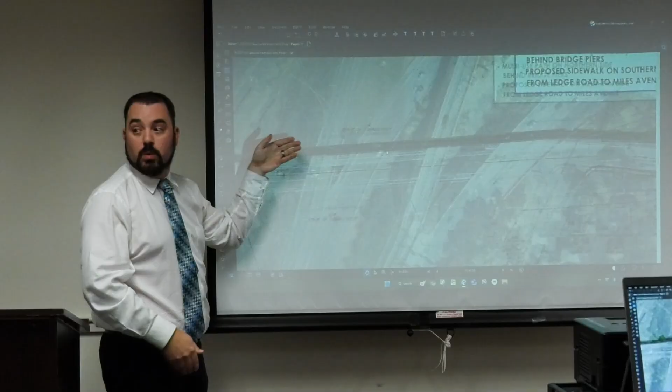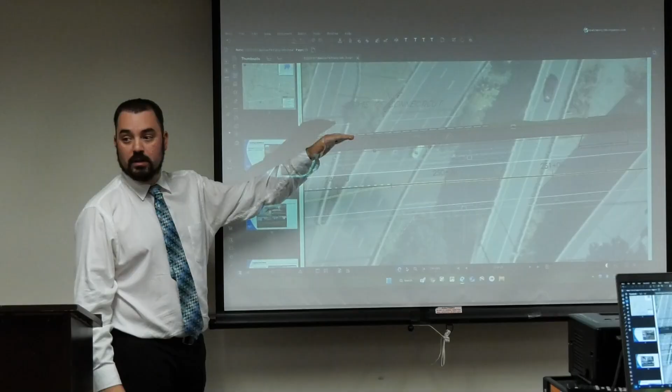So it's going to run right through here. You're not against the roadway - we're not proposing any widening or narrowing of the roadway under the bridge, that'll stay the same. It's basically a triangle on the opposite side - you just chop it right down, and there's going to be a wall next to a wall, essentially. This abutment holds up the bridge, and a couple feet off of it there's going to be a retaining wall, taking out this material in here. Okay, understood.

Somebody mentioned speed bumps. I wanted to reflect back to where you have that exit ramp and the trail crossing the exit ramp that comes down onto Woodford Avenue, right next to that bridge abutment. Everybody agreed that traffic turning right coming off that exit ramp doesn't see anything coming and is cruising right through it. Being familiar with a lot of trail projects, these busy intersections and trail crossings are always one of the lingering issues that follow trail development. Have you done traffic studies to see how much traffic's there, and how does that compare to other problematic intersections on trails already built? Is there a possibility of calming traffic coming down to there, since you're not going to put crossing lights there for the bike path?

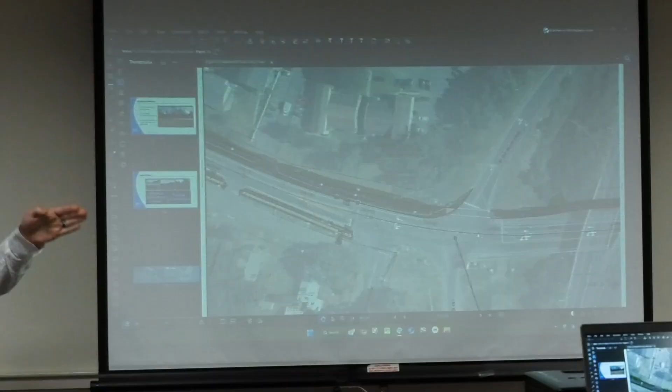Because if you come down and right turn on red, or even just a slip - if you can see from here, this gray line is the existing radius of that turn, which is kind of a straight shot almost. We're actually narrowing the radius, so it's a little harder to make that fast slip. Maybe add a no-turn-on-red sign. It's already there.

Just to give another example, there's the trail segment under construction in New Britain across Corbin Avenue. Corbin Avenue is also a state road and it's very wide. People come flying up the off-ramp there to Corbin Avenue, and if it's green, they fly right around. Because the crossing is right there, that project is putting a no-right-on-red for the ramp traffic. But that's different, that's already here.

Yes sir. Tying into an earlier question, you talked about your property line and how you have bushes there, and your sidewalk will be turning into the trail. In all the different aspects and areas throughout this project, will there be any funding opportunities for property owners to make enhancements like a wooden barrier, shrubs, or anything to divide or delineate the lines between the trail and the properties it's right up against?

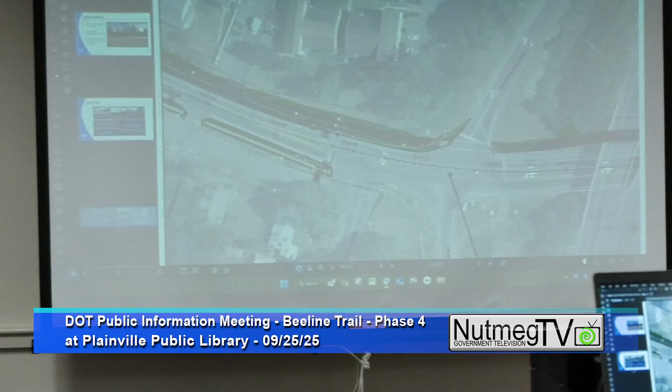Other questions? Any changes to this plan presented tonight, where can us as residents find that? Is that just going to be posted to the website, or will we have another meeting like this to go over it? It would be posted to the project webpage. On the DOT website, right? Yeah, the project website listed on the slide.